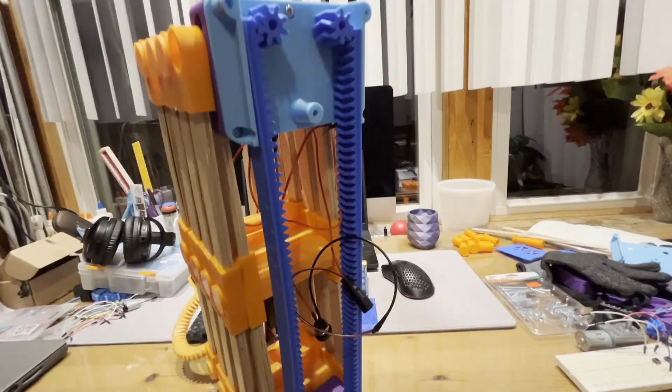Here I finally mounted it to the whole scissor jack thingy. That's great, I tested it out, and it moves pretty smoothly. The new and interesting stuff here is...

giving me a bit of a headache, and then there's a later headache that's more mind-boggling for me. Here is a bunch of racks — well, there's 2 racks. I go up here, and then I have these 2 double helix gears, which are double helical racks that just kind of turn. It'll go up and down. That's the idea right now, but that's not what's happening right now.

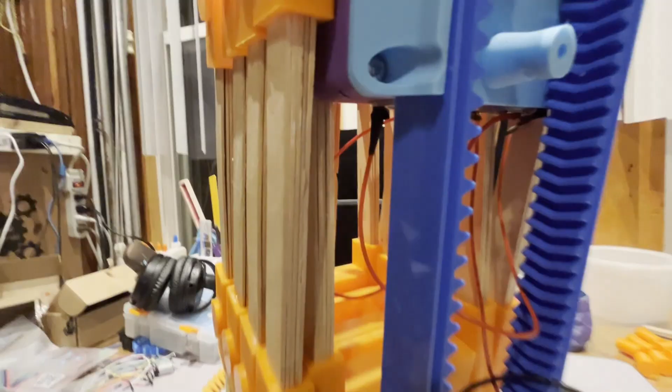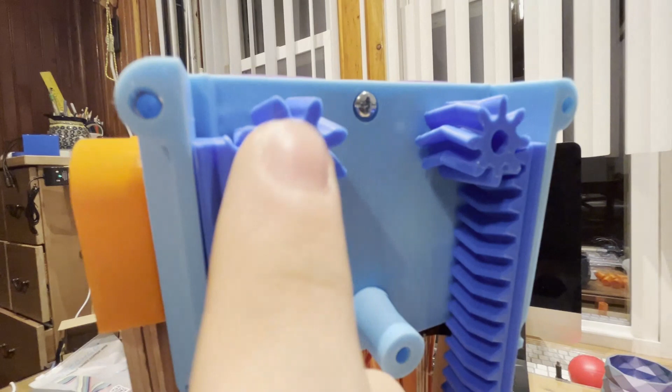Originally I had these 50 RPM motors like there and there, but I tested them out and they just kind of broke the internals of the PLA gear in here. I was like, okay, I'll just ignore that issue for now and hope that when I get 6 RPM motors it'll be great. I don't know why I bought 50 RPM motors and thought that would be strong enough to move this whole mechanism, but...

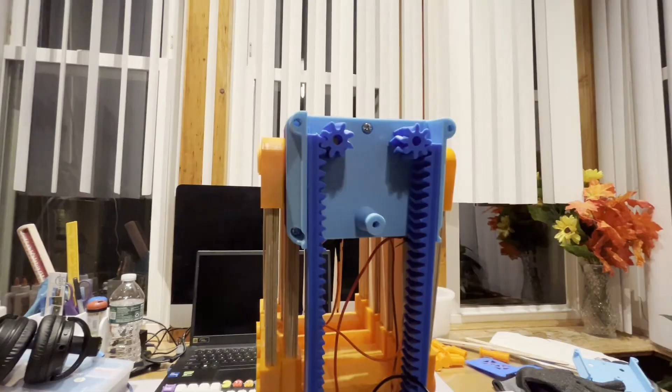it clearly wasn't. I put some more thinking into it, and I was like, no, that's not happening. Now I'm using 6 RPM motors. It's gonna be much slower, but better. I know RPM is kind of relative, but with these motors I'm using, I think it'll be fine. In the motor there's a worm gear inside, so it'll hold the position and make sure it's pretty rigid.

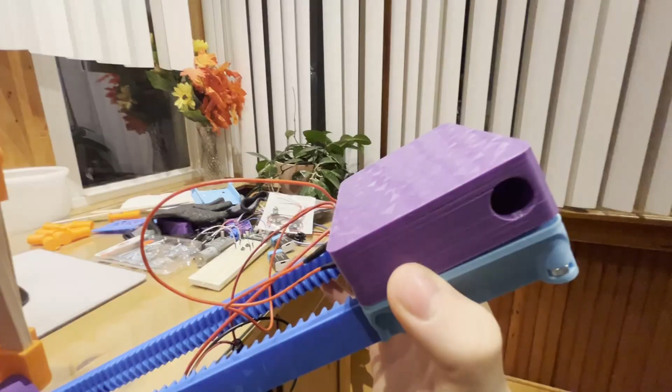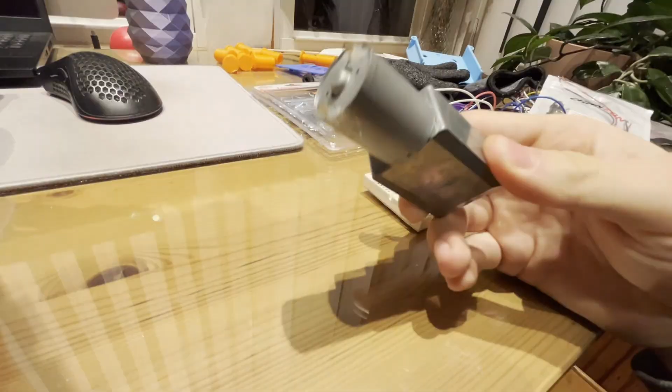Here I'm gonna have pins that go with the same kind of thing I have here, where I'm just gonna hammer it in and hope for the best. Right now I don't have it in. This has a bit of weight to it because once again it's 2 of those motors. This isn't the exact motor — this is a 3 RPM motor, which I showed a while back. It's basically the same thing, except here it doesn't have the screw hole, and that's about it.

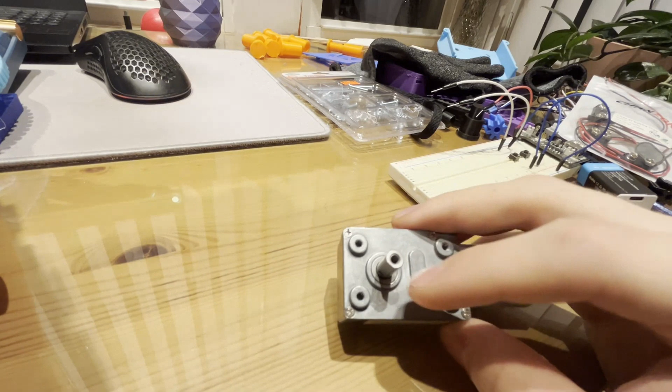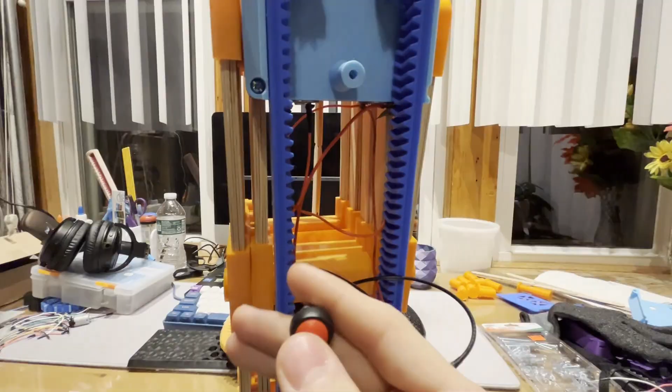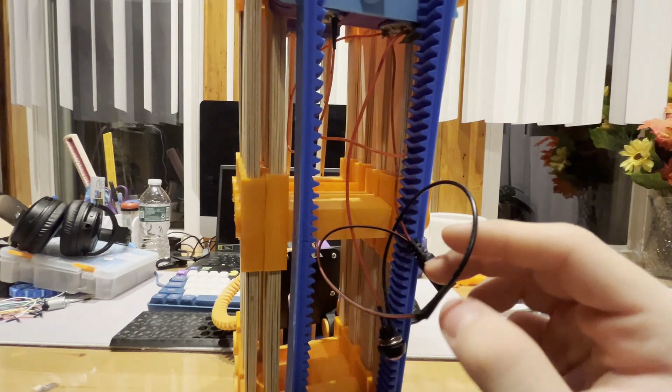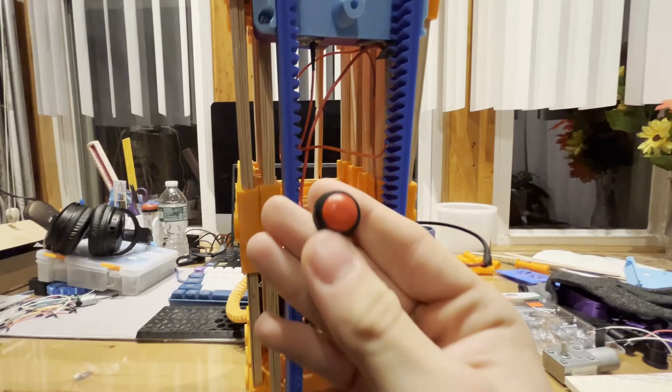The thing that's been really pissing me off though is wiring everything up. I know how to solder, but not too well, so I do my best, and it works pretty well — I get the wires together and it works well enough. I don't know how, but when I was planning this out in my head, I thought I'd create some wire thingy, electrical engineering thingy, where I'd have 1 battery and 2 buttons connected to 2 motors. I could really just simplify it down into 1 battery, 2 switches, and 1 motor, but what I just can't figure out is with 2 of these buttons, how to just switch the direction of a motor — that's just not been computing in my head.

I know there's definitely some way, but I haven't thought of it and haven't found one online yet, so I'll get to it. Also, a quick explanation for why I said it's equivalent to just 1 motor: these motors are basically doing the same thing, so it's basically the equivalent of 1 motor, just wired twice, I guess.

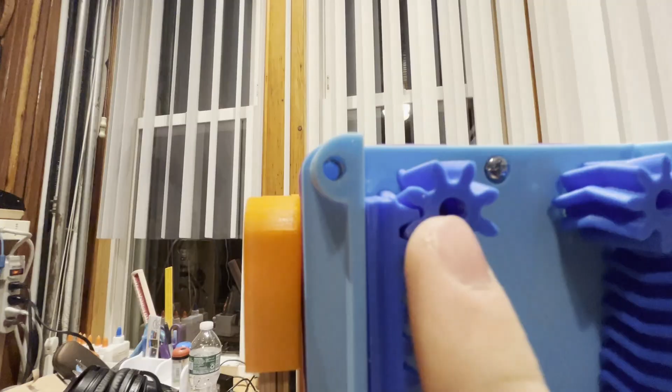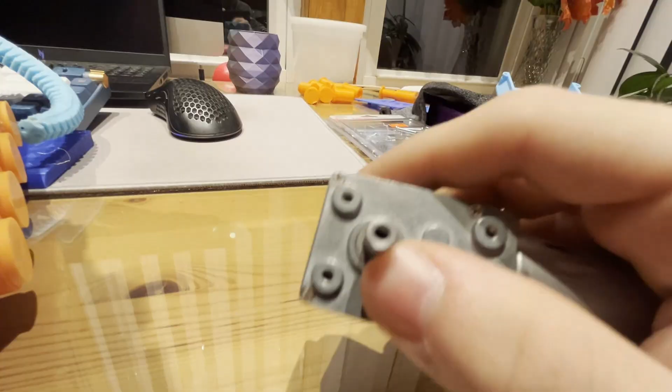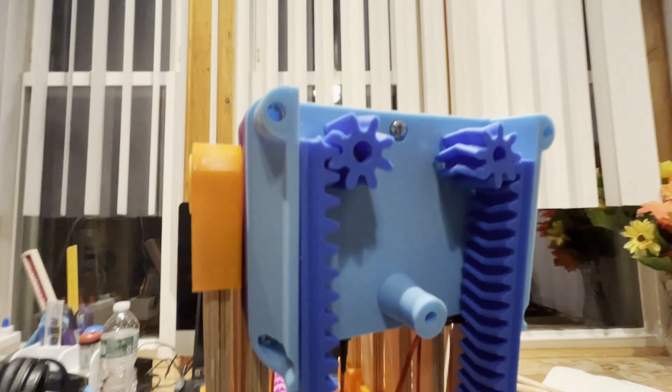So I went to some company's website and was like, please make me these with better material. I ordered those, and those will come in eventually. We'll see how that goes.

Oh, a few things with 3D printing — I was busy with other stuff, so I didn't print these all at the exact same time.

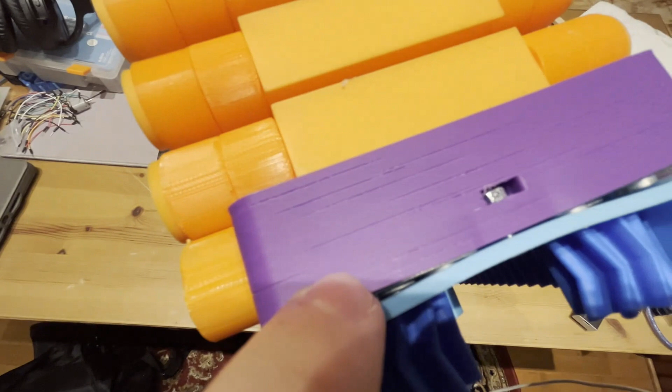You see how there's these gaps here? I don't even fully know what was going on with my printer at the time, and I was 3D printing stuff for robotics so it had the same effect. I was so confused trying to solve it, but as you can see from other 3D prints, I solved it. I just don't know how I solved it. I'll take it. Another W.

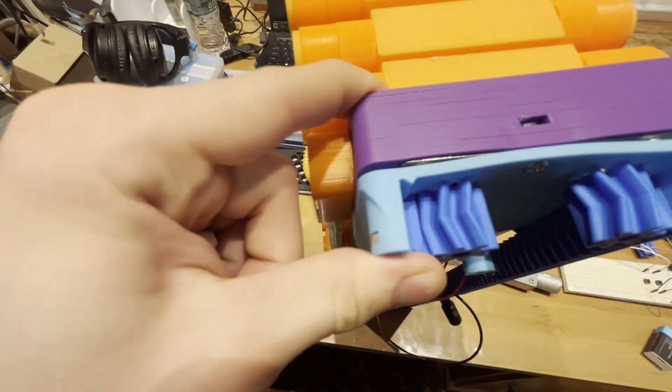That's kind of it. I've also been kind of confused on how I want to mount this to the side of my arm and make it easy to take on and off.

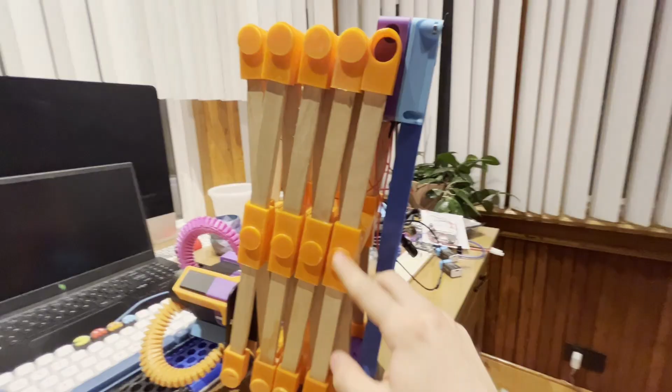That's a headache for definitely later. The best kind of connection I figured out is probably a solid connection here, but here and down here I'll probably have a beam going across, because the position of this and that is just going to keep changing as it slides. This is going up, so I have to make sure there's a section there, and this has a section there too. I 3D modeled it, but I'm probably not gonna have it as the final design.

I'll probably pull it up in a second so you'll maybe see that. I kind of have this triangle thing going on here, and I'm thinking it's gonna be good enough, but that's also the only option I have, so I hope it is good enough.

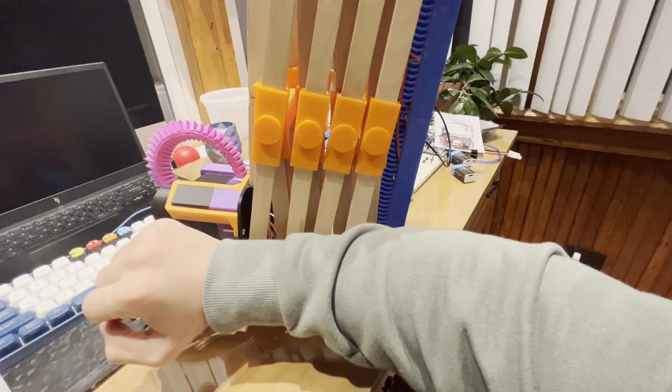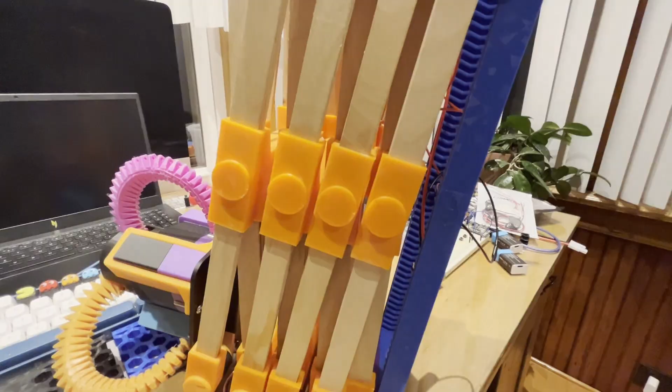Besides that, it's even harder beyond that, because how am I supposed to get a triangle mounted to my arm? This is the next question after that. And after that, it's how do I get a thingy mounted to wrap around my arm and also connect the glove and hold all of the electronics and stuff, and that's even more. But holding the electronics is easy. It's just having it wrap around my arm, and other people's arm and everybody's arm is a bit different, and figuring that out is a bit difficult.

I've had the idea in my head that I'll have one of the 50 RPM motors I bought beforehand - reduce, reuse, recycle - and use one of them to tie in shoelace strings, tie it like a shoe kind of, and then I'll just tighten it, and it'll be so much easier to just have it auto-tightening. It's gonna be beautiful. That's the plan at least. I hope that goes well.

Alright, I'm going to show you guys the 3D model I have right now. A few other small things.

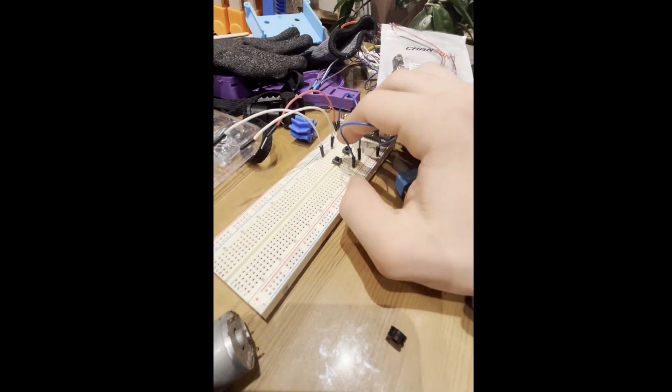This switch mechanism thingy has been really confusing me, so I was trying to figure it out by really dumbing it down onto a breadboard before I actually soldered the wires and stuff, which I still didn't figure out, but I don't know.

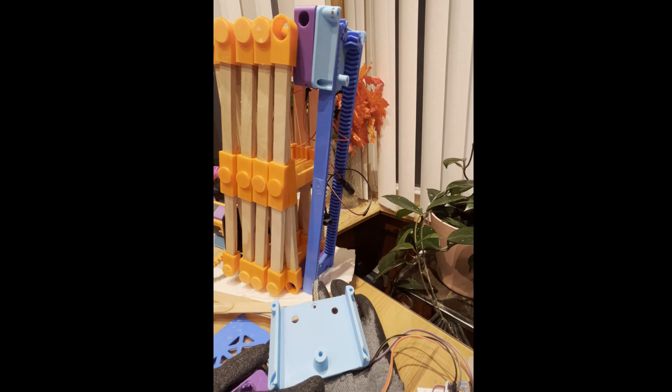The reason why I have everything soldered there is because I got too excited and just wanted to see if it could extend. I have a 12 volt battery now for these motors, so it's even better, making sure they're working at whatever load they're supposed to, so I get the most use out of them. And it just broke the gears, and I couldn't really see if it worked or not. So I really can't wait till I can see that work.

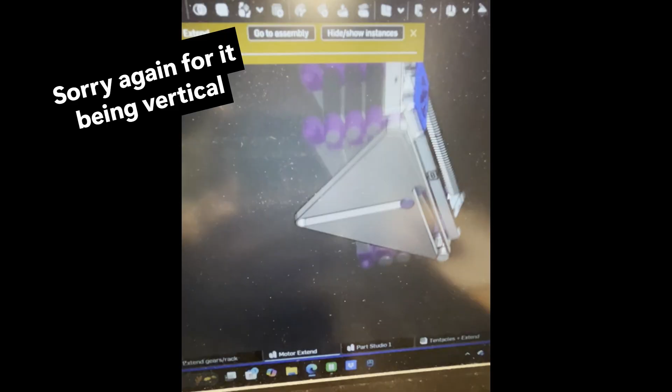Here we have my beautiful masterpiece. Kind of like how I explained, it is kind of just like a triangle. This is all in Onshape. I highly recommend Onshape, I love Onshape.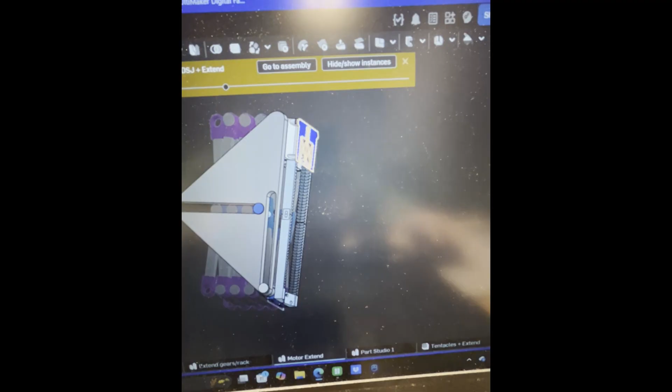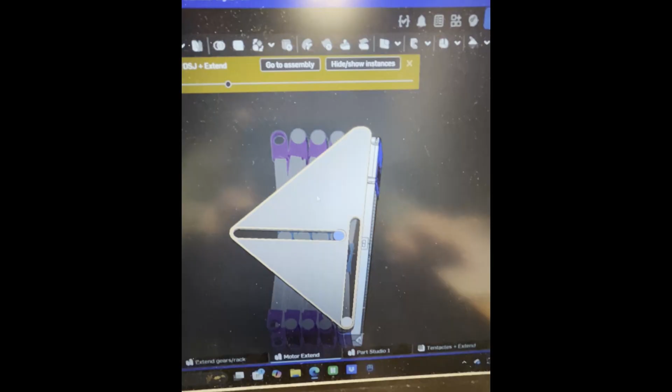Here we can see the CAD of everything beforehand. Let me see if I can just... no, never mind. Basically I made some pockets into here so it'd be lighter and also just less filament when printing this. I don't know exactly what I'm gonna make this out of, but I guess my only option is printing it out in PLA, because I really don't want to buy from another company and spend money on that.

Money's tight. Yeah, this is just gonna be shifting side to side. This is gonna be up, down, and that's kind of it.

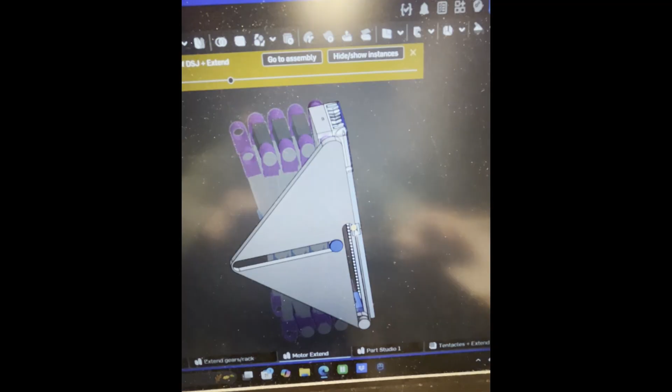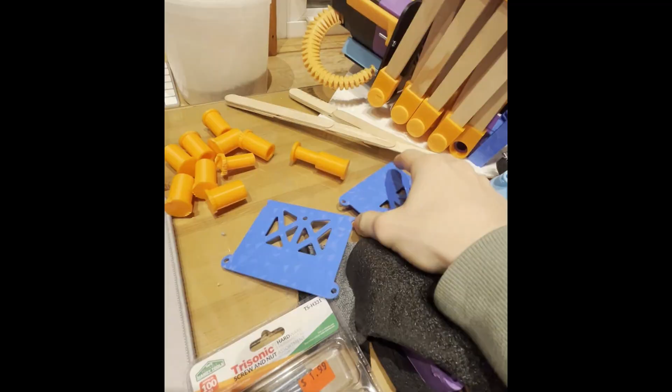Alright, lastly, some of these plates I had to reprint because they either broke. That one's the actual one. This one broke though because of bad cutting on my part. Same thing here. Alright, bye.